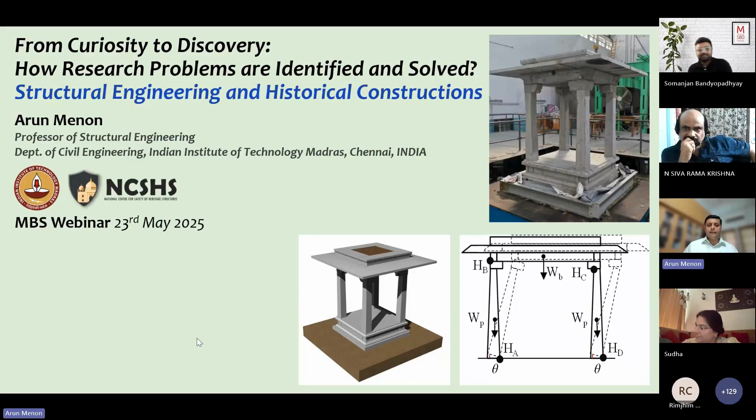So that's the context within which I'm coming to you. I have actually divided my presentation into two parts, and for specific reasons, I would like to look at an entire building, and then I would like to look at a part of a building and try to understand how a research problem can be developed from an interesting question.

So all of us are very curious and must develop that curiosity strongly. And so when you see a specific context and you're working in a certain context, you have questions. You must be able to examine those questions more and more. Try to make the question as refined as possible.

And then it's at that stage you then understand, okay, if I need an answer for this question, what's the process I should follow? What can give me a convincing answer to this question? That is where these two examples sit, right?

So it's important to talk of types of research and where this sort of work actually sits. Very broadly, research is divided into different types of research, but then we must also be able to look at what is the process of research itself. How does it happen? So I will begin by speaking a little bit about research.

And the two aspects that I will touch upon is this earthquake safety of historical constructions, picking up one particular typology and trying to formulate a problem and then trying to solve and get some credible answers from the inquiry.

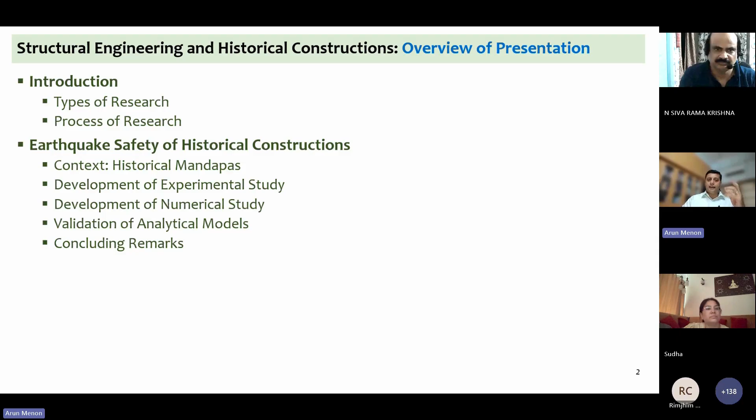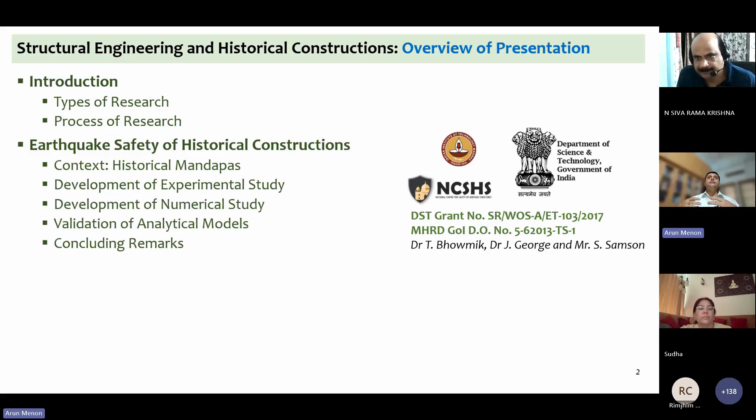This particular project was actually what we call a funded project, in the sense we formulated a question, and when there was a call for proposals from government agencies that say, look, you have to do research so that the body of knowledge keeps increasing and we have better solutions to ensure several things, better solutions for the country, better solutions for structures being built in the country, and so on. So there are organizations, government organizations, that will call for proposals.

And when we receive such calls, we prepare a research project proposal. It's only an explanation of what we want to do. And if the government agency is convinced that it's an interesting problem, and yes, you can spend some amount of time and you will need some resources, which means you will need some funds to actually explore this problem, then the government institution is convinced and says, okay, here, take some money and you can actually work on this problem.

So the Department of Science and Technology, in this first case, received our proposal, examined it, asked us tough questions, and then finally said, okay, look, over a 3-year period, try and give us some answers. And this is what typically happens in educational institutions. The government comes in to fund research, and that is how the body of knowledge keeps increasing over time.

We call this funded research. But at this stage, let me also tell you,

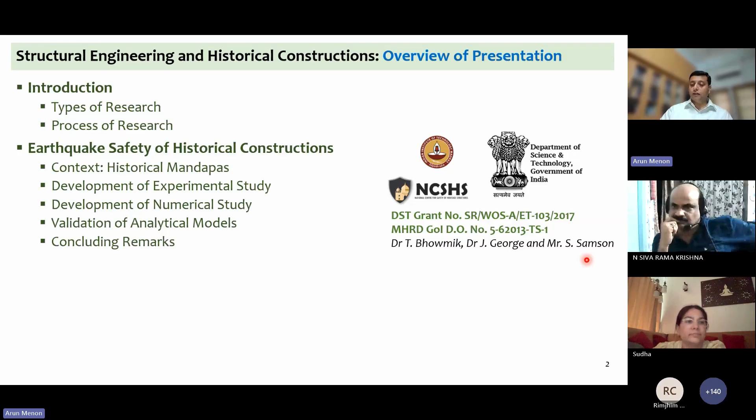We are able to do a lot of research because we are able to have a collaborative team. We are able to work with students, and with other researchers who are interested in the subject. This first work I'm going to talk about is not purely my work, it is the work of a team that I led. The three names you see here, Dr. Bhowmik, Dr. George, and Mr. Samson, actually worked together to carry out this project over a period of 3 years.

The second problem is more on one part of a building. We tend to work at multiple scales. Sometimes they are at a microscopic scale, what we are working on might not even be visible to the human eye. In some cases, it's part of an entire building. In certain cases, it's the entire building. So the first problem is an entire structure, and the second problem is part of a structure.

Once we understand the behavior of what we are trying to study, we then try to see: is it behaving well? Is it behaving inadequately? Can we improve the behavior? If we do that, then we also create a way of engineering a better performance, and that's where technology comes in. This can actually be given back to society, and you can say, look, you can improve the behavior of such systems by doing this. And that is where new technologies come, patenting comes, and so on.

So I brought in the second problem to talk about how we can look at our history, try to learn the way our ancient builders built, but try to see if there are some issues in today's context that may be an inadequacy, and then try to improve it so that we are able to preserve these buildings for a much longer period of time. So the second problem really talks about such a problem, such a context.

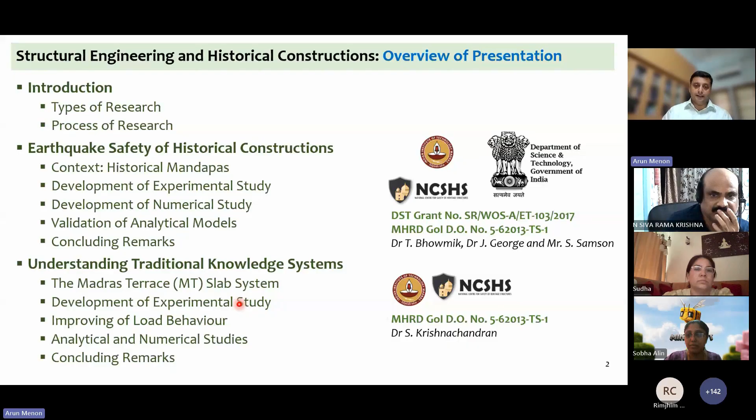So that's a little bit of an introduction on how the presentation is structured. I said I would begin by talking about different types of research. Many of you must have listened to different people talking about research, many of you may be doing research, and research broadly in the domain of sciences, technology and engineering falls into 3 broad categories: fundamental research, transformative research, and translational research.

Fundamental research is almost research for the sake of a better understanding, a better scientific understanding. You're going deeper and deeper to understand how these things function, why something is going wrong. Most of the sciences work in the subject of fundamental research. You want to understand the composition of some materials, you want to understand why that type of a natural material was formed. All that is fundamental research that typically happens.

Transformative research is where you, through research, through some innovation, really change the way we are doing things. Today we talk so much about wind energy and solar energy. We are able to tap this energy so much. Although wind and the sun's rays exist in the environment and have existed so from time immemorial, we've had to actually understand these systems, create ways of tapping it, and scale it up for use by human beings, and in the process have ensured clean energy. That type of research is an example of transformative research. It can really change the way the world is functioning.

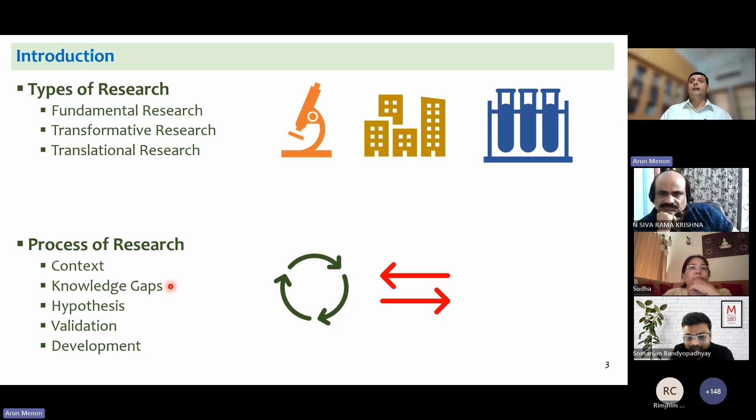In fundamental research, no one's going to come and ask you, okay, you found out about this, how do I take it to the market? No, in fundamental research, it can stop with answering that question. Okay, having said that, let me go to the first problem. I would like to take about 10 to 15 minutes per problem so that you get a fair idea of what we're talking about.

Since I work in the subject of historical monuments, we keep asking ourselves, as I said earlier, historical monuments and earthquakes. You keep hearing about earthquakes and you keep hearing about structures that have been damaged. And now you can imagine if you have a monument that's been around for 1,000 years or 2,000 years or a few hundred years, and then there is a massive natural disaster like an earthquake, and you lose this structure.

Then who is to lose? We as human beings are the losers, because we have lost a part of our history. We have lost a possibility of looking into the past and understanding how our ancestors lived. So it's very important for culture. It is very important for continuity of the civilization to be able to preserve these.

Okay, and to preserve these buildings, these structures, you should know how they behave when struck by a natural disaster. And you should have means of protecting these, you need engineers to be able to protect these. So that's the whole context, right?

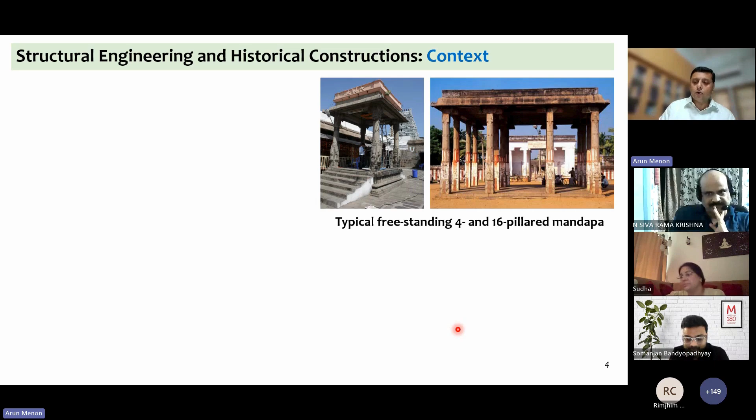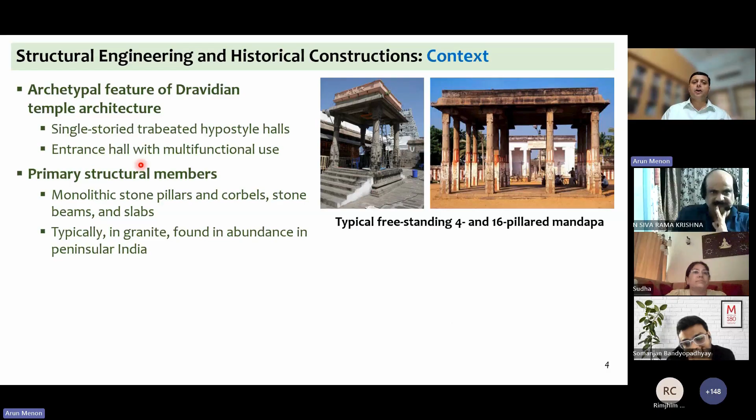And you have these halls, which are 4-pillared, sometimes 16-pillared, sometimes even 1,000-pillared. So they are very complex. They can become very complex structures. We looked at the simpler ones, of course, because you can't start off with a very complex structure.

In this, there are multiple parts. As you can see, there is a plinth, there are pillars, there are beams, and on top of beams, there are lots of stones that are placed as slabs. And in South India, granite is a type of stone that is available in abundance, and you can find it in several parts of South India. Most of these constructions are made in granite.

And mind you, they are all single piece of stone, column single piece of stone, beam single piece of stone, each part of the slab and the roof slab and so on. So they are monolithic, meaning one piece of stone. Now, that was the type of structure we are looking at.

But what's interesting is, if you look at South India, these structures are just constructed by placing the beam on top of the pillars, and the slabs are placed from one beam to another beam. So they just placed one on top of the other, like a pack of cards. And we realized that they're not connected to each other like Lego blocks, or they don't have any steel sitting there acting like a connector.

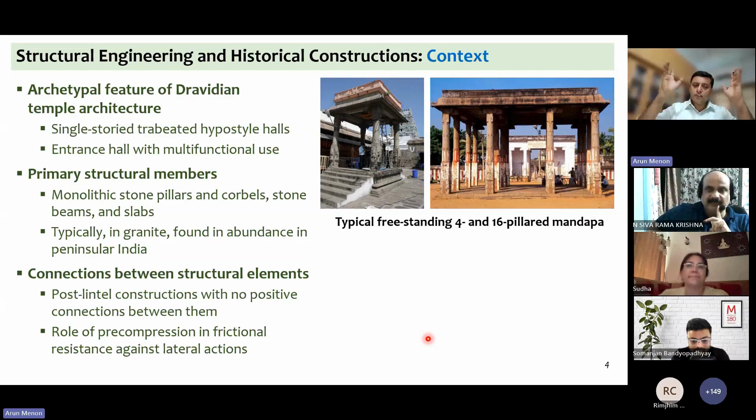So as you place heavy material one on top of the other, the joint has friction, and it is the friction that is actually holding the structure together. Under gravity, it's all okay, but if you were to give it a lateral thrust, which can happen during an earthquake or heavy wind forces, this can potentially move. And so this was really the question with which we began working.

Now, I was talking about South India, then we said, okay, let's look at what happens in different parts of the world. And if you look at a little broader perspective, you go to earthquake zones where earthquakes are quite prominent. So if I were to go to Nepal, where earthquakes happen frequently, or if I go to Gujarat, where the Bhuj earthquake occurred, the region of Kutch is rather earthquake prone, and you have similar structures.

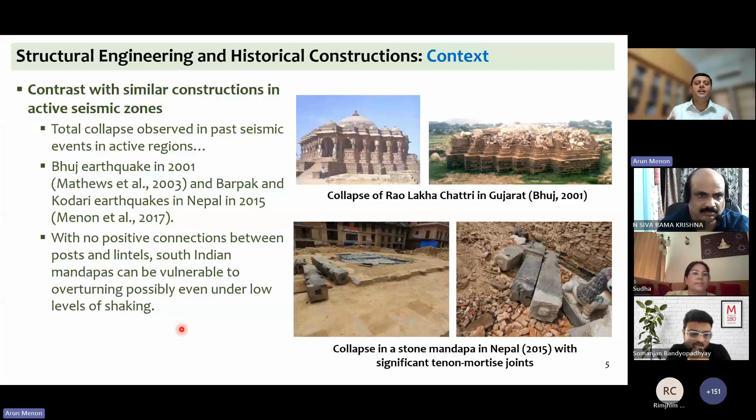So we went forward, and as I said, we have to identify knowledge gaps. We started reading a lot about it, trying to look at similar contexts the world over, and did some calculations, because we know how these structures may behave, so we can make some simple calculations. When you study structural analysis, very much like what you learn in physics, you're able to understand how these structures will shake, and when they shake, what can happen.

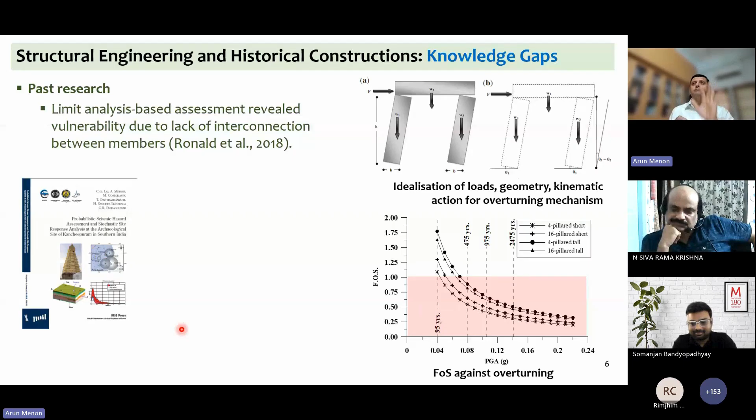There is inertial force generated when there is an earthquake - the inertial force is nothing but the mass of the structure into the acceleration of the ground. So we are able to find out how much force is there, and then we see under this force, is this fellow going to collapse? Some initial work actually showed us that things don't look rosy - things can collapse. And so that was the basis of the inquiry.

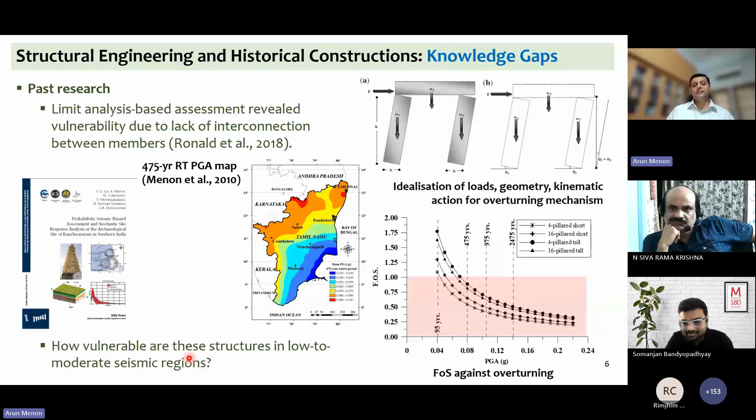So we did a lot of this literature review to be able to identify the knowledge gaps. Our fundamental question was: how vulnerable are these structures in low to moderate seismic regions - seismic meaning earthquake-prone regions? With that question in mind, we said okay, now let's write up a proposal and put it to a funding agency. We did that, and then we were able to get some funding to take this forward.

The calculations that we did showed us that things may not be okay, so we have to really validate it. So how do we validate it? Can we make an earthquake happen? No, I don't think we can - it's a natural process. But we can try to replicate earthquakes at a small scale. So we can make an experiment where we shake the structure, and that can validate whether we got our calculations right or completely wrong. So that's what we did.

So in this project we said we will develop a full-scale model, but I can't build this model of a mandapa, which is a historical construction, like I build concrete or brick structures today. It has to be very much like how it was built in the past. So what do we do? We go and find a sthapati, a person trained to make structures in temples - also called a sompura in other parts of the country. They know how to dimension these and can construct it for us.

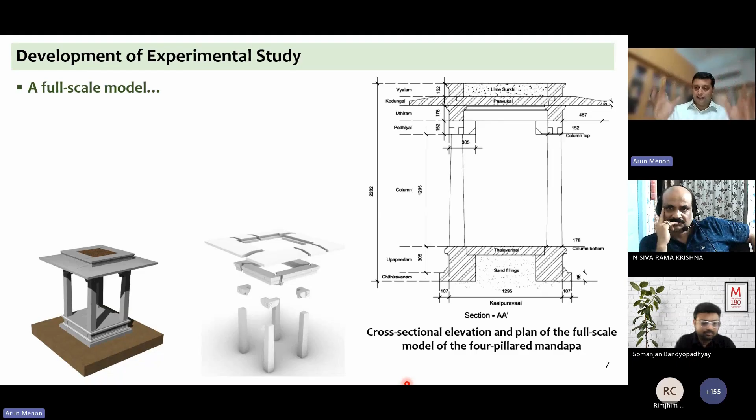So we got a sompura, or sthapati - a traditional architect - to come and construct it. They have rules for how much the column must be, how much the plinth must be, how much the roof must be. And he constructed it for us completely.

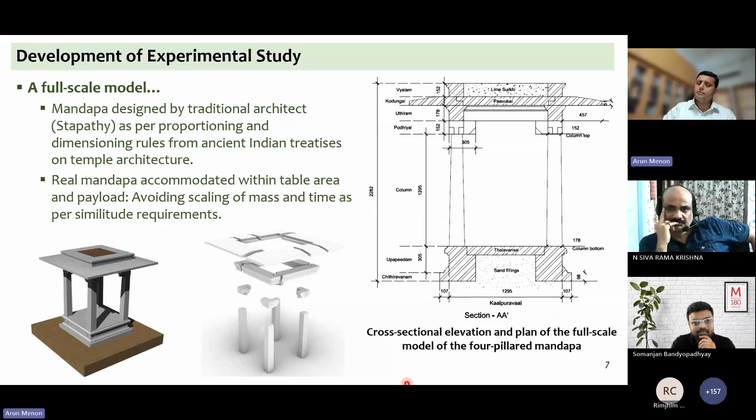He made 2 models actually for us to play around with. And there are always multiple things scientifically that one has to look at. So we decided the size of the structure and started constructing it.

I'm showing you some pictures from our lab. The base, normally these structures are built on sand and so on, what we refer to as an earthquake simulator. We have an earthquake simulator in our lab in IIT Madras. We built this model on top of the earthquake simulator, and then the traditional mason built it for us completely.

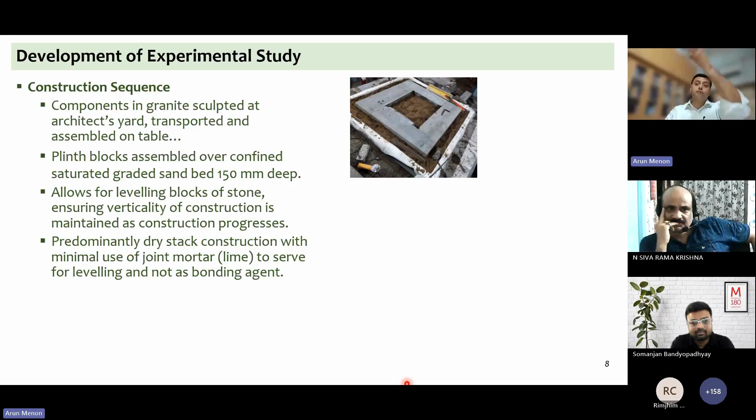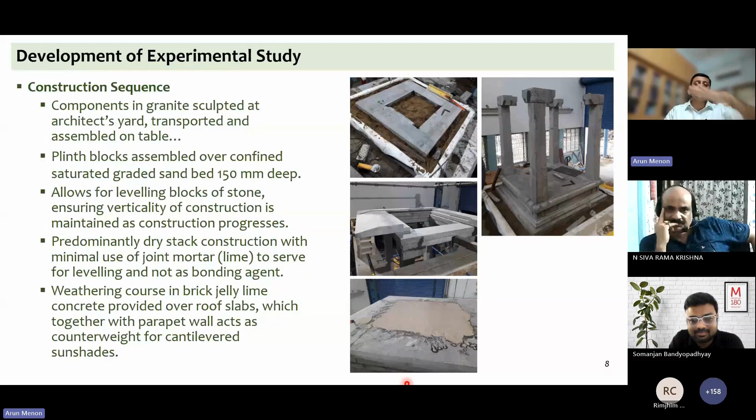You can see the plinth level sitting on sand, and then the columns are coming up, and then the beam is placed, the roof slabs are placed. All this is in granite, mind you. And then once everything is over, we fill it with concrete, lime concrete. Lime is a material used for construction, and that's a traditional material that's always been used. So lime concrete is used and filled, and then there you have the structure completed.

So you see this blue box on which the structure is sitting, that's the earthquake simulator, meaning it can actually simulate earthquakes that you want to generate, want to subject the building to, and it can be as much as you want it to be. So I can generate a small earthquake, I can generate a large earthquake, and of course only the table will move. The building, or the laboratory in which it is sitting, will really not be affected. It's only the model that will be.

So it's very convenient. You're creating an earthquake sufficient to make that model that you want to study collapse, but you are safe. The building is safe. You don't damage the structure.

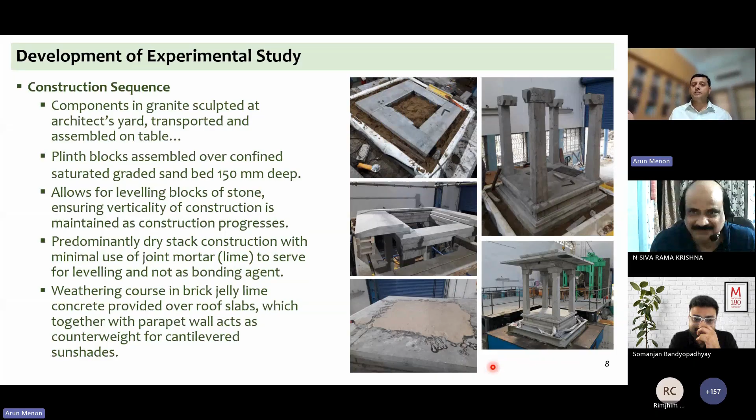The test is carried out on what we call a shake table. It's a very simple name. What is it used for? It's used to shake buildings, models of buildings. It's called a shake table or an earthquake simulator.

In our laboratory here at IIT Madras, if some of you visit us, we can show this simulator to you. IIT Madras conducts an open house every year in January, and thousands of people come to see all the facilities inside the institute. We keep this facility running so that people can see what the simulator can actually do.

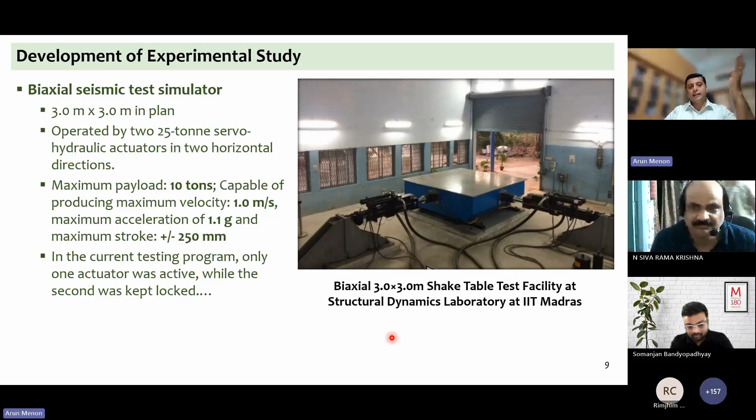This is a 3 meters by 3 meters table, and it has 2 hydraulic arms that can actually shake this whole structure. I can build a model that is about 10 tons in weight, and it can shake and take it to collapse. So that's the simulator. So now what do we do?

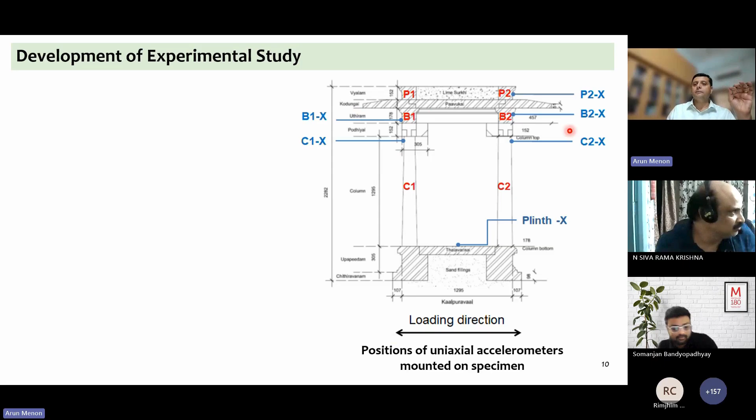Since we are actually doing a study, we should be able to measure how much the structure is moving. So we instrument the structure. We have to decide all the instruments that I want to put on top of the structure. You see this picture with all this nomenclature around in blue and red. They are nothing but sensors. So we put a series of sensors so that we are able to understand how much the structure is shaking.

We also carry out other tests on this before it is damaged, after it is damaged, and so on. It is almost like the doctor is going to work on the patient, and before that, all the tests are done, and all the wires are attached, and now we can go ahead and do the test.

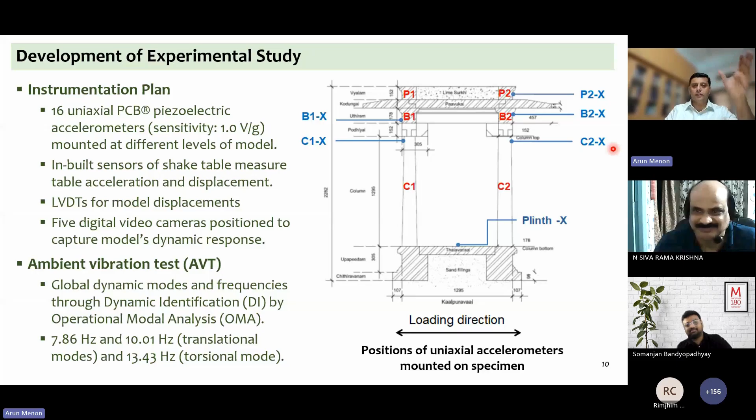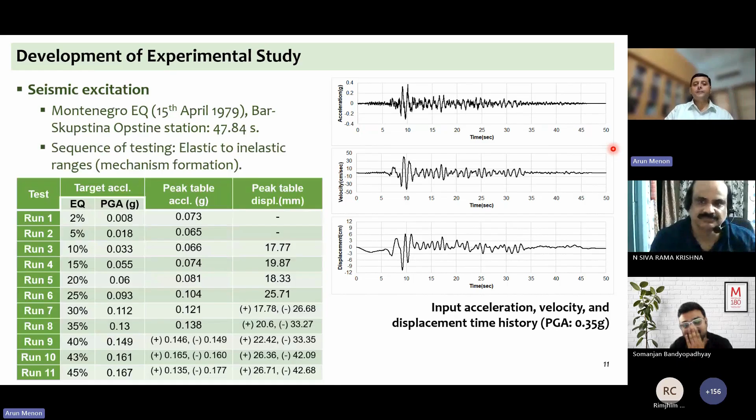We take that. We went and took an earthquake that happened in Europe, the Montenegro earthquake of 1979. By the way, that was 2 years after I was born, so this is a very ancient earthquake. We picked up that earthquake. And so what we do now, we have one model, and we start shaking the model.

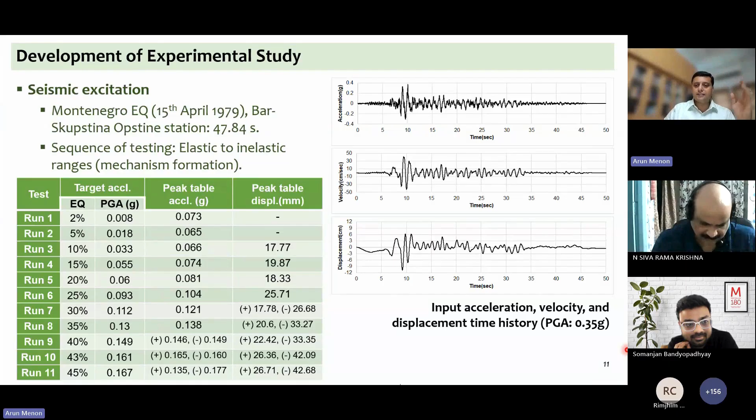We scale it down and then scale it up slowly till we reach collapse, using the same record. So that's why you see we're doing this test: run 1 at 2% of the shaking, run 2 at 5%, run 3 at 10%, till run 11 when it finally collapses. With all the instruments, we're able to measure the maximum shaking at the table, the maximum shaking on the roof of the structure, the maximum movement of the structure, and so on. That's how the problem is defined.

We keep doing this. If you have one model, you do all the tests on that model, but if you have the luxury of two models, like we had, you try to see if you're getting the same results, because replicating is very important for scientific confirmation. The first time it may just be chance, but if you're able to do it a second time and think it through, then maybe you got it right.

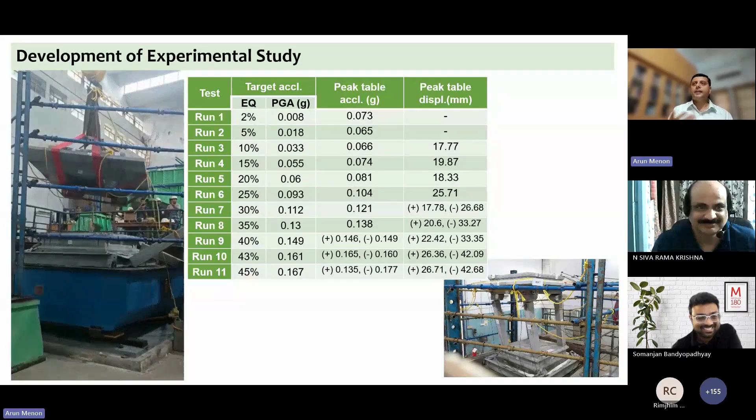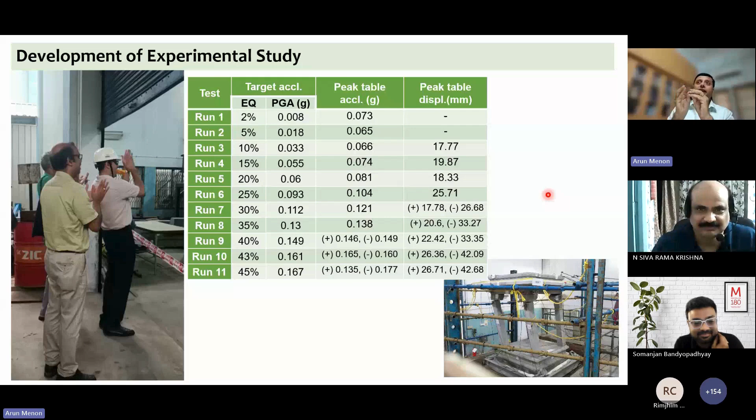We take some joy in collapse, you can say. So the picture you see here is just an instant before collapse. It's very important for us to understand in what way it's moving, where it's failing first. We use cameras, we record all this, and we try to understand the mechanism of failure, because if you understand the mechanism of failure, you're able to strengthen it if necessary in that area of weakness.

In different runs, as we keep scaling up the acceleration, at some point it would fail, and with all the instruments we have, it's recording what's happening. The pictures you see here, for example between run 9 and run 10, is when we realized the structure is almost going to collapse. Run 9 it worked, but then when we went to run 10, there was a much more severe response.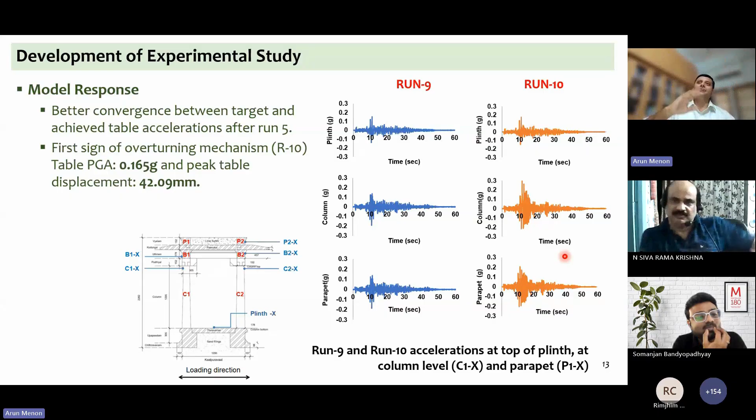It slowly started opening up. The joints, as you know, have no connection there. It's just sitting, so it can open up and rock - there's no connection. It opens up, and at some stage in the movement, it's unable to come back, and that's the point that triggers the collapse.

Our intention is to be able to capture that, and we got it. Here you can see, just before it collapses, from the top - we've got cameras everywhere. We really need to plan all that, deciding where to place each one, because the test only runs for a few seconds, and within those few seconds you should be able to capture everything. So we've got multiple cameras, and all this requires a good amount of planning and funds.

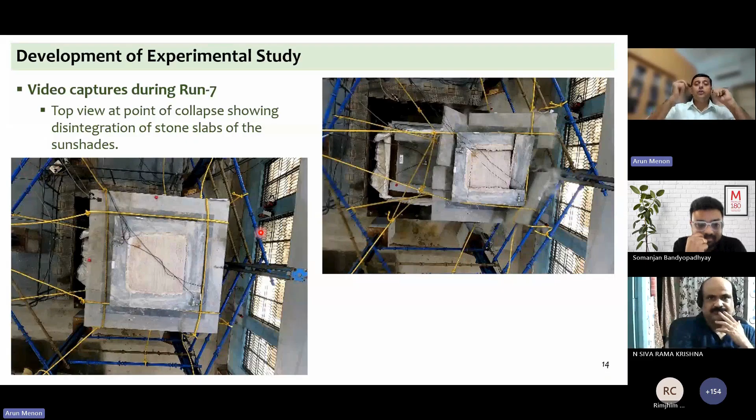That's why we write a proposal, and that's why we value all this a lot, because the public is giving us money to do this sort of research. So this is just the instant of collapse. Why do you need so many pictures and videos? Because then you can see the sequence of failure, and understand that this part of the structure is working, this part is not working, where can I improve, and so on.

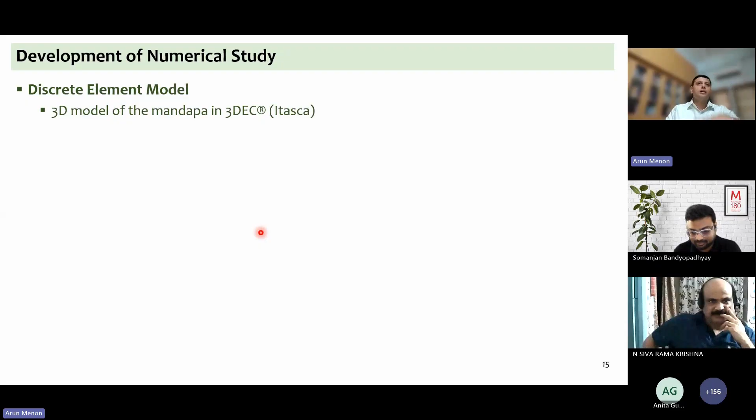Now it doesn't stop there. You've done an experiment, but can you do it on a computer? Can you simulate this on a computer? Can you do this using simple hand calculations? That is important, because it demonstrates that you've understood what is happening - it's not a black box. So we try to develop a computer model.

I won't go into some details here, but I just want to show you what that model looks like. On a computer, we try to simulate this - it's called a numerical model. We develop this numerical model and try to subject it to the exact earthquake excitation that we put on the shake table.

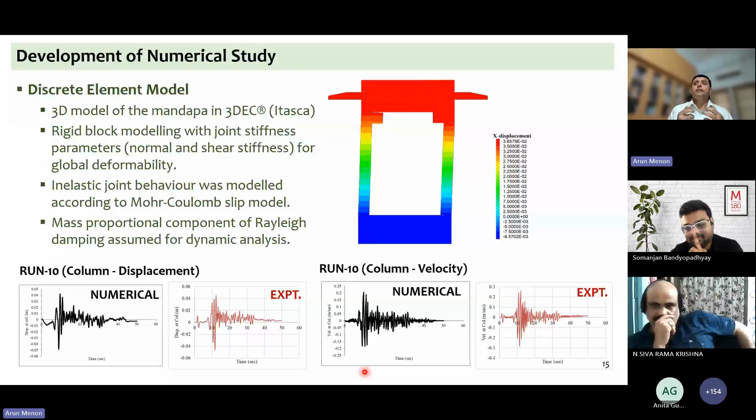And then, if you're lucky, the results match. Sometimes you'll have to do some back and forth, calibrate your model, and so on. But we feel great that a numerical model of the real structure is able to give you similar results, and that's good confirmation because you're in a better place to understand what's happening. Not only a computer model - computer can do a lot of complicated calculations simultaneously - but are you able to do that with hand calculations? A simple understanding is very important, so we tried to make a simple model.

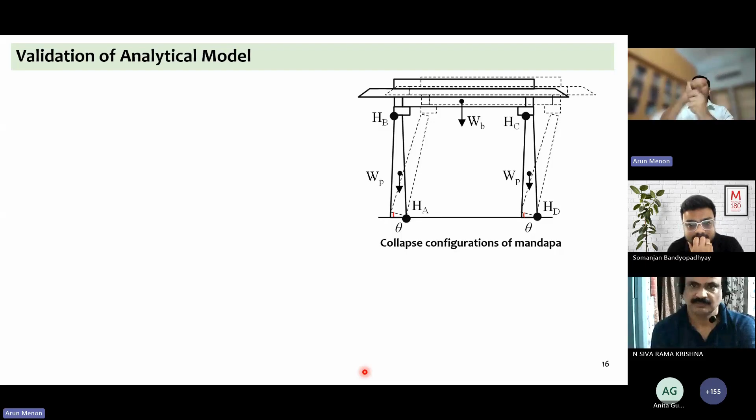The cartoon here is a model of the mandapa just before its collapse. We can use different methods. Here we use a method called limit analysis - that is, at the point of collapse, at the point of mechanism formation, some joint is opening up and about to overturn. Are we able to write the equilibrium equation? You use equilibrium equations a lot in physics. This slide is nothing but writing the equilibrium equations.

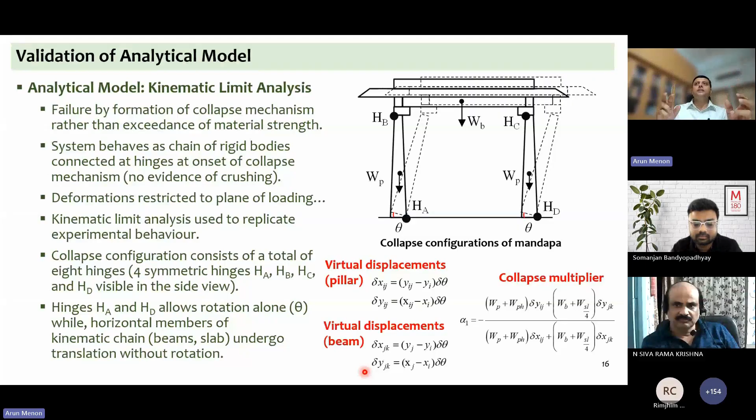I'm applying a displacement and the structure is moving. The structure will resist that movement, and so there is a force, there is a reaction. Are you able to quantify it mathematically? At some point it loses equilibrium, and that is called the collapse multiplier - that's nothing but the lateral force at which the structure has collapsed. If you're able to quantify that, that's a great thing.

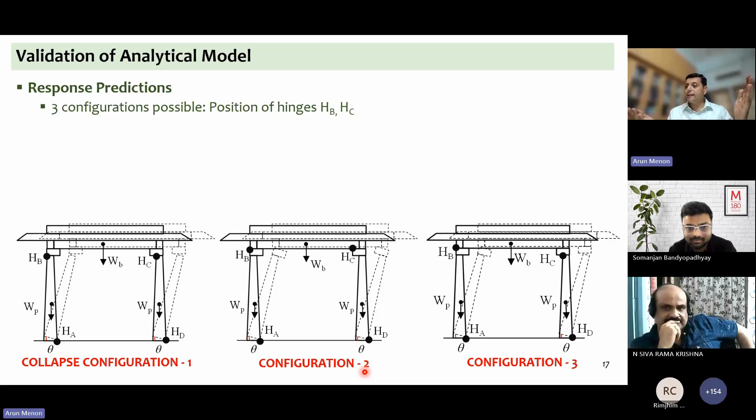Now, I showed you photographs from different angles. Why is it important? Because depending on where these joints are opening up, you can actually have different answers for your calculations. That's why we kept looking at what's happening and checked if our numerical or hand calculations matched these situations. When we did that, we found we had to really match our calculations to exactly where the joints were rocking and opening up - and it was this first configuration.

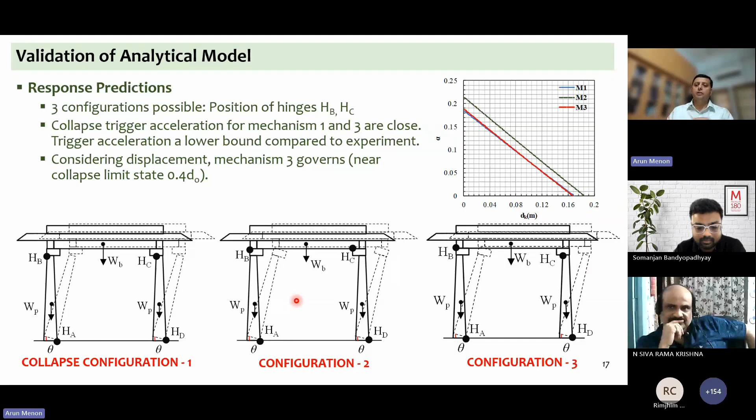Very interestingly, if you remember that video, one of the joints opened above this corbel and the other joint opened below the corbel on the opposite side. So as it was moving forward, the forward segment opened below, and the segment at the back opened at the top. All our calculations, we kept doing it either at the bottom or at the top, and we were getting wrong answers. Only when we matched exactly how the physical model behaved on the shake table did the results match. This gave us a good understanding through both a complicated numerical model and a simple hand-calculation model of how such structures behave.

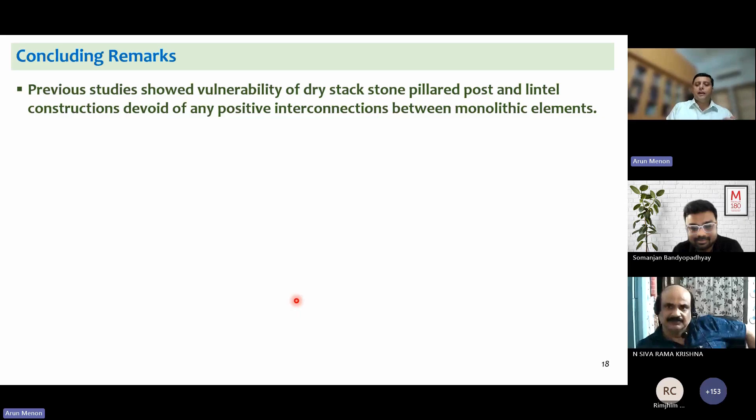So the first part, very quickly: we were trying to understand how these dry stack stone pillared structures - what we call post and lintel, because you've got posts, beams, and then slabs - behave. They have no positive connections. We knew that these were vulnerable, and we wanted to quantify how much. So we did what we call the shake table test. It's dynamic because it's time-variant, it runs for under 50 seconds, and we found how it actually behaves.

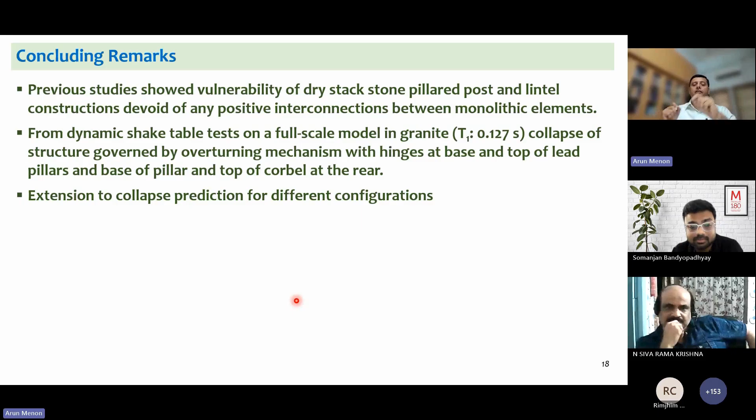Now, having validated a mathematical model, we can extend this to much larger configurations and confidently predict how the system works. This gives us confidence to check the safety of such constructions in different areas of the country. In South India, it gave us an understanding that these constructions have survived because the level of earthquake shaking required to make them collapse typically does not occur - that's the reason they've survived so many years. But if you look at a longer lifespan, the chances of larger earthquakes over a longer period of time are not impossible.

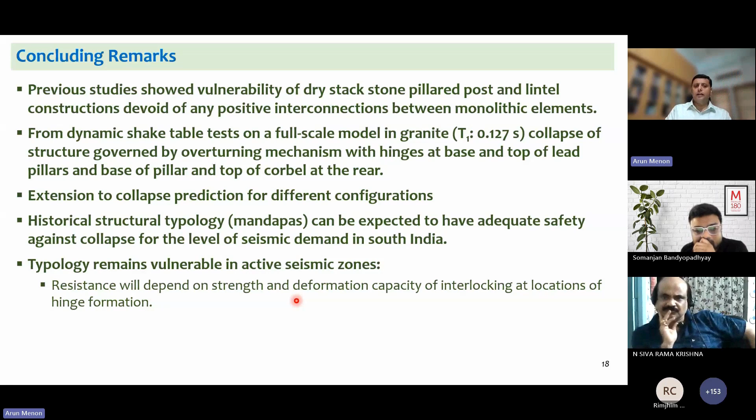But if you go to highly active earthquake zones, like Nepal or Bhuj in Gujarat, you need to have something that actually holds this together. Interlocking is important - like you saw the one in Nepal which had collapsed, but there was interlocking - and even the interlocking may be inadequate in certain cases. So this was what we learned from this one study that looked at an overall structure. I'll quickly show you another one, at a much smaller scale, just one part of a building.

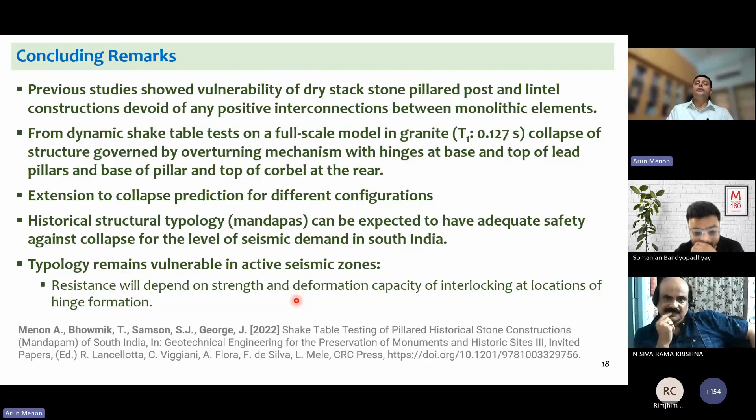The second one deals with historical constructions again, but part of a building—a floor slab construction very common in South India. It's called the Madras Terrace construction, named because it was prevalent in the erstwhile Madras Presidency. Prior to independence, a large area of Andhra, parts of Kerala, and Tamil Nadu were all clubbed into what is called the Madras Presidency, and this was a very common construction typology there.

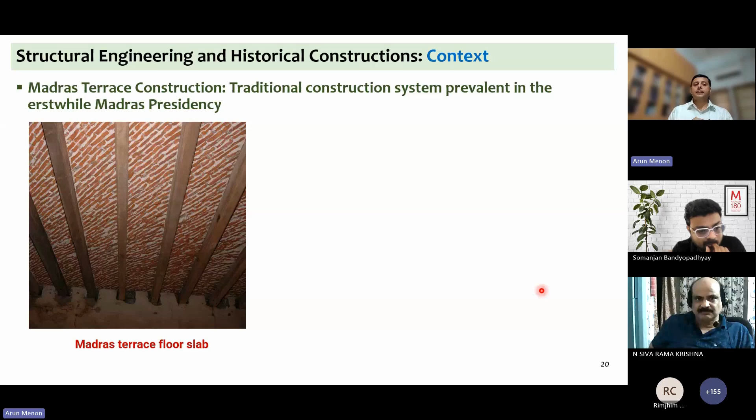Many historical constructions have these floors, but over the years they get damaged—there's deterioration, aging of materials—and very often we just take them off because they're cumbersome to make, and many of these materials, like different types of timber, may be quite expensive and prohibitive to purchase today.

But they are very beautiful constructions, and if maintained well, they can last a very long time. You can see how these bricks are placed on their edge in a diagonal fashion, and then lime concrete is put on top—a very beautiful construction. There are few people who can construct this even today; there are specialist masons who can still do it.

But what's typically happening is, since India is developing at a very fast pace, old buildings that are run down tend to get pulled down and new buildings constructed instead. But when buildings have historical value, it's important to preserve them as much as possible, in a way that they are structurally safe.

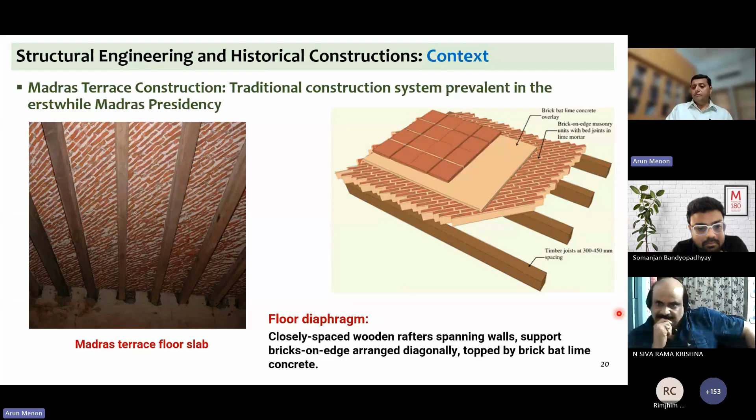So the structural safety is paramount, and it's important to understand, even in this context, if there is earthquake shaking, how do these floor diaphragms behave? That was the inquiry.

Our intention was—there is a segment of people who've been saying that if there is an earthquake, this behaves very poorly and the building can get damaged, so remove it. We wanted to really examine from that perspective: is it really performing that badly?

Or can we repair it in some way? Can we strengthen it so that it can survive even some small amount of earthquake shaking? If small interventions are sufficient to make them safer, we might be able to save and preserve this typology, so future and current generations can look at this beautiful system of construction. That was what was happening.

It's very interesting that you can just remove this timber rafter—you can see the gaps in the walls. You can pull them out and replace them if they're deteriorated because of moisture or termites, which may come and damage the timber. So this is the typology.

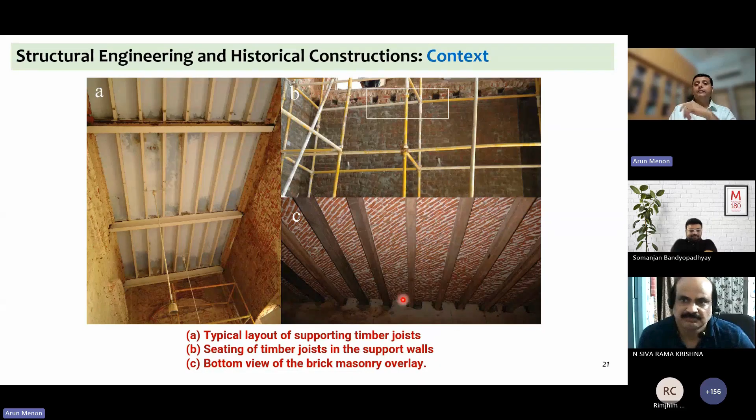What's interesting is there are codes available in the country called the Bureau of Indian Standards, BIS, the IS mark, a standardization mark. There is in fact a standardization book, one of the codes which talks about this construction, the Madras Terrace construction. So it's quite well understood how this has to be constructed, but its performance under earthquake loads is a gap—we really have to understand if there is a knowledge gap.

And that knowledge gap is what we are trying to formulate within a research problem. In this particular case, we want to understand how this behaves—gravity forces are always there, but earthquake forces come very briefly and infrequently. So if they come, how do they perform was the inquiry.

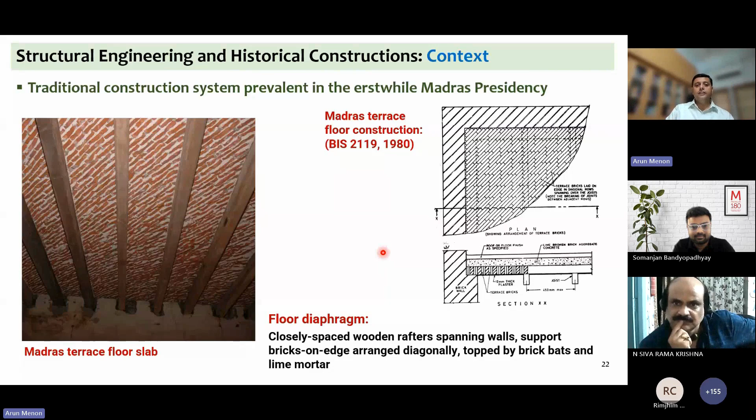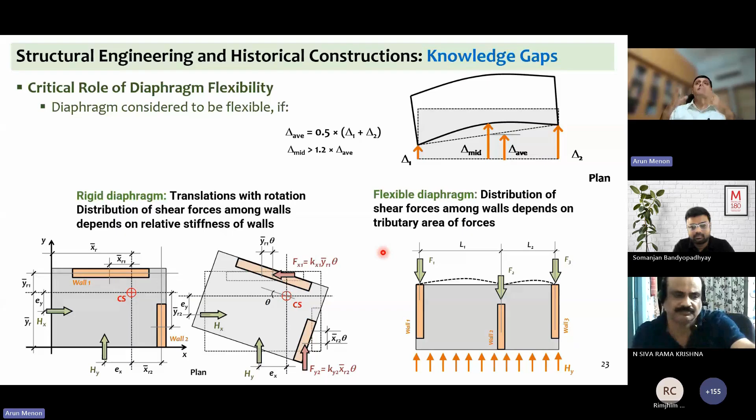In this case, a floor diaphragm—this is a complicated slide, but I wanted to tell you it is possible for us to understand how these systems function mathematically and physically, and also understand, if you have a very stiff floor diaphragm versus a very flexible one, how that affects the behavior of the structure in an earthquake. That is the basis of the entire theoretical problem.

Now, what we have realized based on past research—I said it is important to look at past research.

Past research has shown that if you have a diaphragm which is very flexible, like a timber floor, it's quite flexible in its plane. A concrete floor is very rigid in its plane. These two sit at the two ends of the spectrum, but there are many typologies of diaphragms sitting between flexible and rigid. We tend to classify them as semi-rigid or semi-flexible diaphragms.

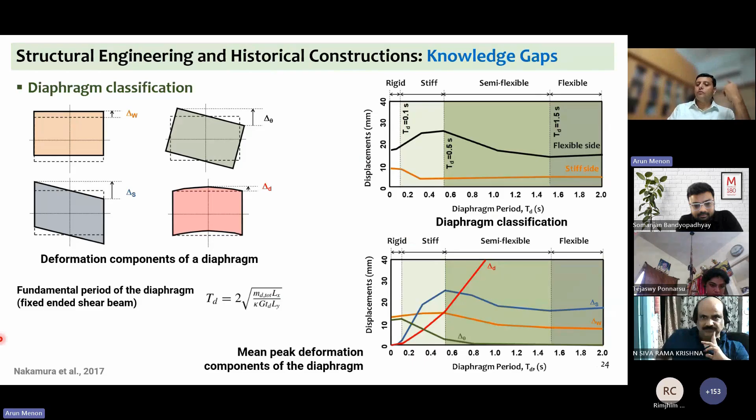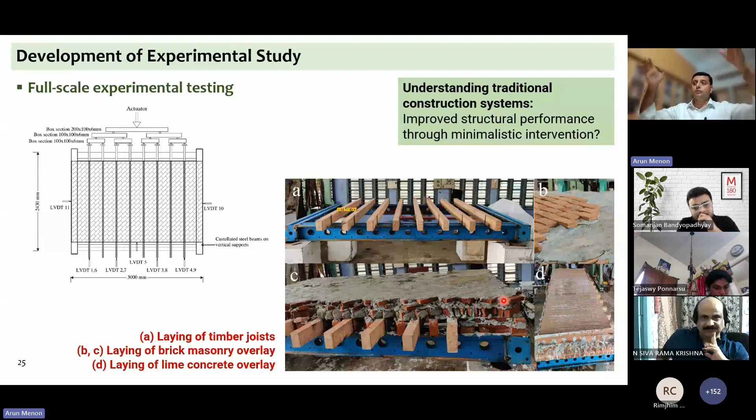How do we do that? We developed a full-scale model. We got a traditional mason to come and design this floor for us. You can see an engineer prepares a drawing and works with the sthapati or sompura, and this is constructed in the laboratory. The picture on the right is the construction in the laboratory. You have the supports, then timber rafters, and on top of the rafters the entire slab with brick placed on edge and lime on top is prepared, giving you a full-scale test specimen. So previously you saw a full structure, and here you're seeing one piece of a structure.

This is tested. So what do you do? It's an earthquake, so there are lateral forces, forces coming from the side. When we subjected this to a lateral force, we saw something funny happening with all these timber rafters you see, marked with a small red mark. These small timber rafters started moving relative to each other, sliding. So in a way we saw that this whole slab is not working together. Under gravity they were all working together, but when there is a lateral force acting on them, they tend to slide because there is really no connection between the timber rafters and the brick and lime concrete on top.

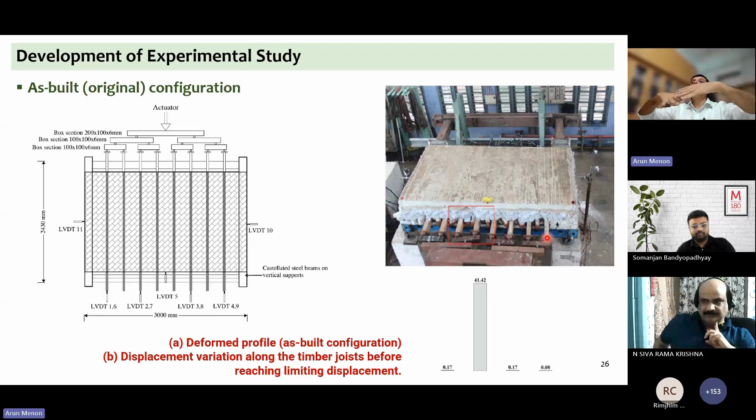So there is the problem, right? This is a nice cross section: you have timber and then brick, and these are not working together. They only work together under gravity. But if you impose a lateral force on it, they disintegrate. And that was a problem, because if they disintegrate, the forces are not going to be transferred back to the walls, and you have an instability problem in the building during earthquake shaking.

So what did we do? We said, okay, if that's the case, the problem is these rafters are not connected to the portion above in brick and lime concrete. Let us try to fix that. So we applied our mind to what may be a good way of retrofitting or strengthening it to upgrade the performance of the slab.

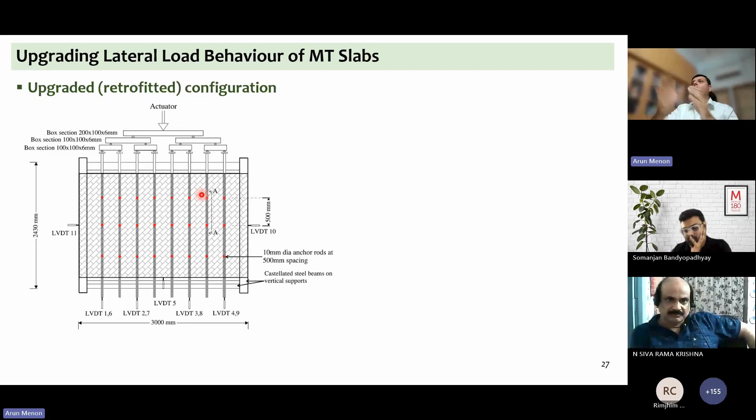So we did that. We took small anchors - there are different companies that sell metal anchors. The red dots you see are anchors that go from the bottom into the brick and concrete layer, and you can lock them. This is very simple because you don't have to dismantle anything; you just install them in the dry condition and they are locked. You can calculate how many are required and so on. We installed these anchors, bolted them, and it was very simple - they were not even visible, you can hide them well in the construction.

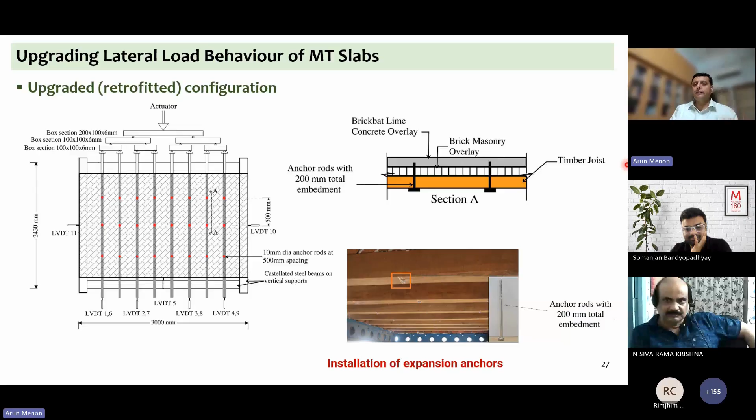Then we tested the slab again. We tested in the original condition, and later we tested in the upgraded condition - what we call retrofitted, meaning it is strengthened and its capacity is improved compared to before. So we did the test again, and this time we saw that the rafters are not sliding relative to each other. They are moving together, taking the overlay, the brick and the lime, together.

And so you have a bigger cross section that is now resisting the lateral force due to the earthquake. That gave us a lot of confidence, and it said, look, this typology of construction has a lot of capacity. So from something that is just sliding to something that is now nicely resisting and responding in an integral manner was what we saw. So we did that.

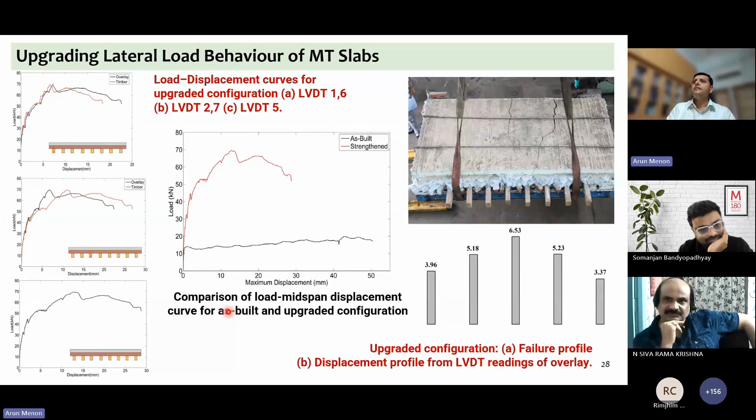And so we have a way of telling the industry, look, don't dismantle these floors in historical buildings and put reinforced concrete slabs or steel slabs there. You can merely retrofit these, save a lot of money, but make the structure much safer. So that was what we did.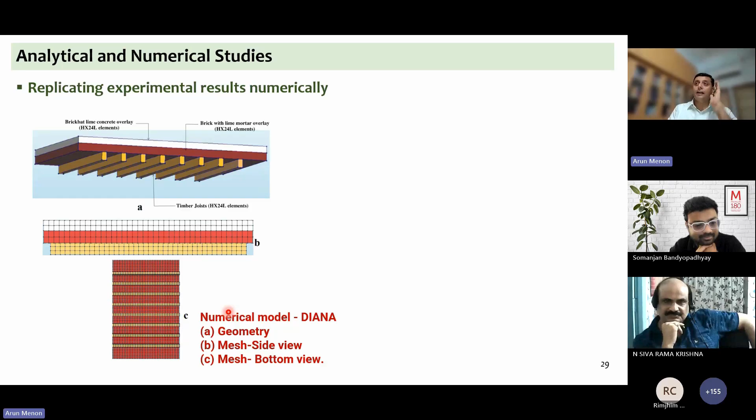As I said, you can't stop with the experiment. You have to be able to analytically and numerically replicate what is happening, because that gives an idea of your understanding of the research problem. So we did a numerical model, and we were able to replicate the experimental results we saw in the laboratory. You can see some pictures showing the replication of the behavior on the computer simulation versus what actually happened to the structure.

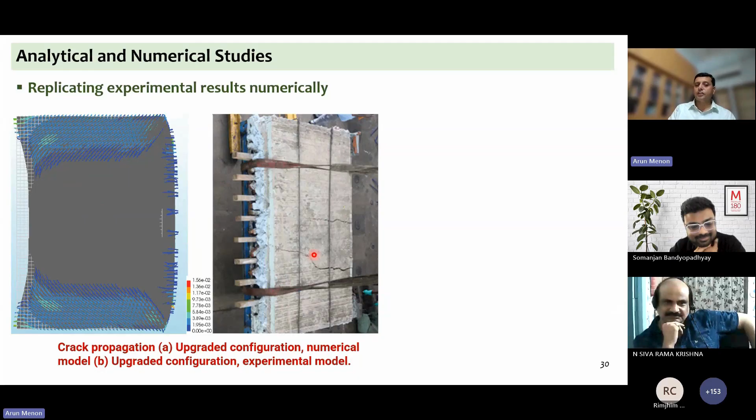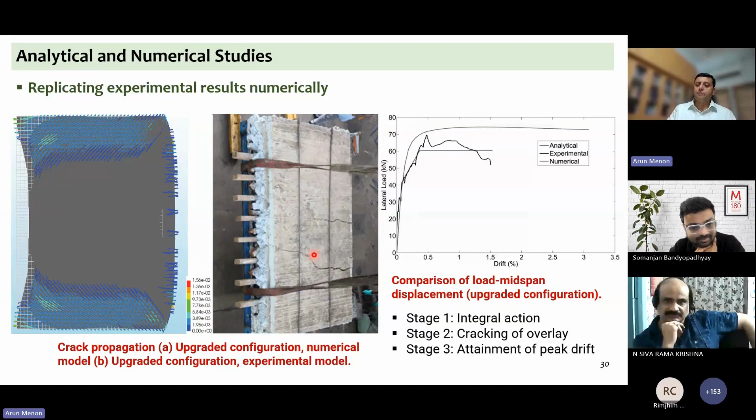As a structural designer, you should be able to understand what any client will ask: so how many anchors should I put? So you should have a way of calculating how many anchors are required based on the behavior of these systems. And that gives us confidence that it can behave well. So we did that. So what did we really do here?

We looked at a traditional knowledge system. In the past, our ancient builders were constructing like this. And we looked at the current context and the problems we face today. I'll tell you a simple example. In a place like Chennai in South India, about 25 years ago it was in a lower earthquake zone as far as the IS codes were concerned. Today, it has gone to a slightly higher level. And so everybody is examining buildings and saying, okay, for the new level, these are all unsafe.

And so they try to remove and put a concrete slab. In the process, we are losing historical constructions. We're losing historical elements in these buildings. So this is a way of re-engineering the understanding of how these structures work.

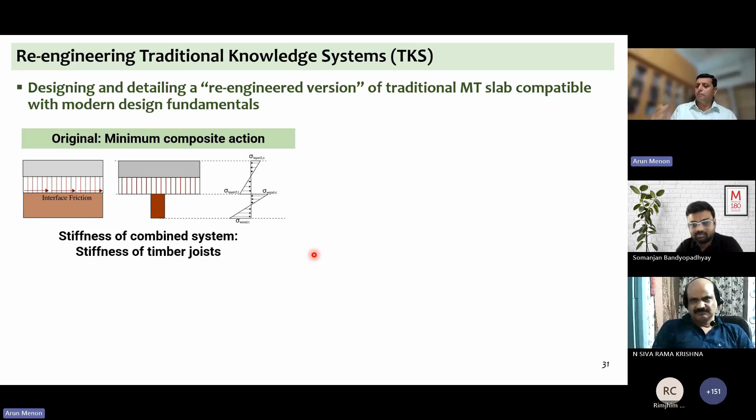This is a re-engineered version of the traditional Madras terrace slab with a small pin that is introduced, and we work out the process by which it can be carried out, and we get what is called an integral action. The timber was not working; they were like friends who were fighting. The timber behaves on its own, and the brick and the concrete behave on their own. They're not working together. By installing this pin, we've actually made them work together, and that increases the capacity tremendously. So that's what we try to achieve here.

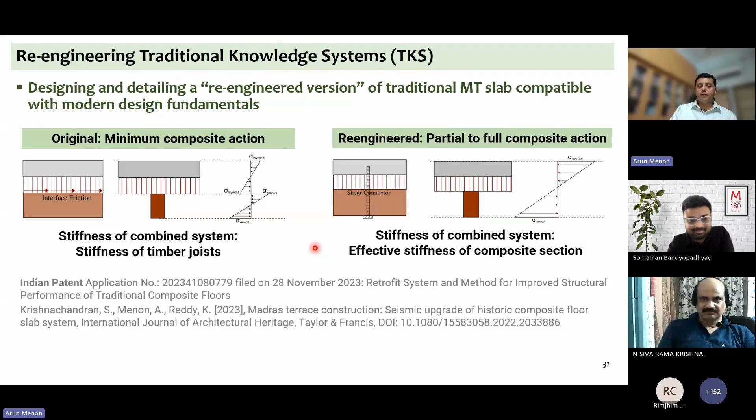Since it's a useful intervention that can be replicated in the industry, we have applied for a patent because it's a very simple intervention that can improve the behavior of such constructions. Again, there is a paper, and if some of you are interested to understand more, you can write to me or try to download this paper from the link and details given here.

So again, all I wanted to do here, in closing, is historical constructions. Research in this area helps us look at how our ancestors built and why they built it in that way. What materials did they use? Why did they build it in the way you see it? Do those things work even today? Or does some improvement really help?

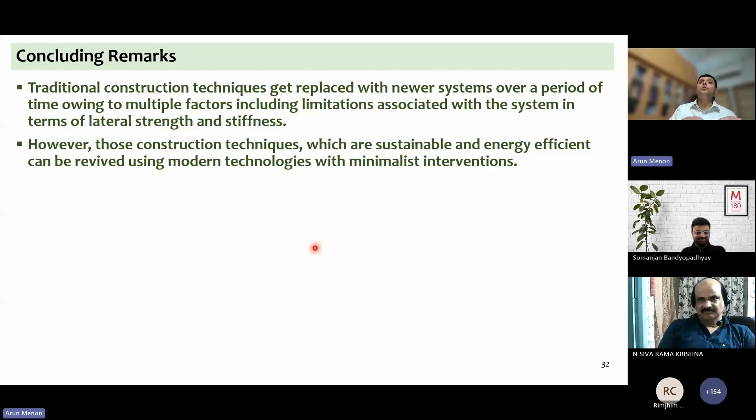Today, there are different contexts of loads acting on these structures. These constructions have lived for so many hundreds of years. They're quite sustainable, energy efficient constructions. So it is good if you're able to preserve them and continue to use them. And this is one of the sustainable development goals, that you reuse as much as possible, preserve and reuse as much as possible. And the research contributes to that sustainable development goal.

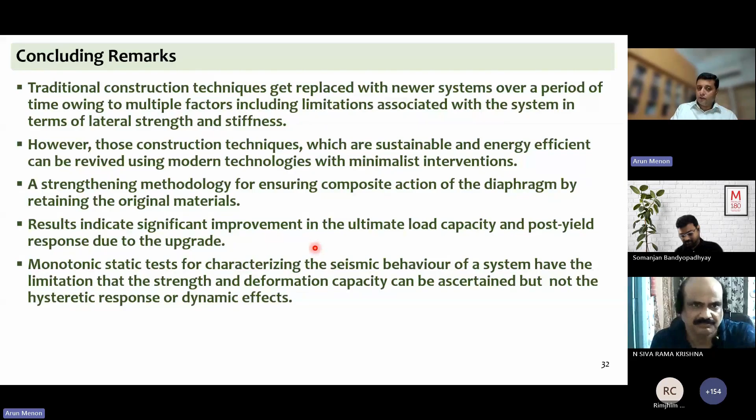So in this, you saw this strengthening methodology and the improvement in behavior that we were trying to see if it works or not. So with that, I stop. I know I have exceeded the time given to me, and I'm open to questions if there are any at this stage. Thank you.

So nobody complained, even if you've exceeded by a little while. I don't think anybody has complained. I have not received a single remark on the chat box. I saw my clock ticking away.

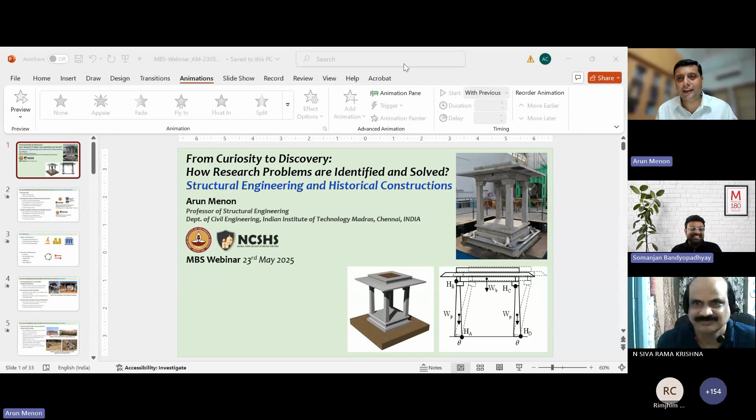On that note, I'll request that for all of you who've been so attentive for the past hour or so, if you could turn on camera, we'll have a quick 5-minute interaction. This is your opportunity to ask as many questions, because the fundamentals of science is that unless you ask, you do not know. And as we learned in the last webinar, a simple innocent question like, why is the sky blue, led to India's only Nobel Prize in science.